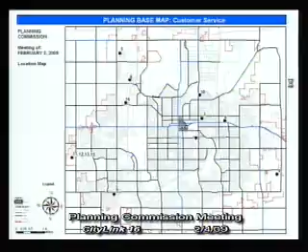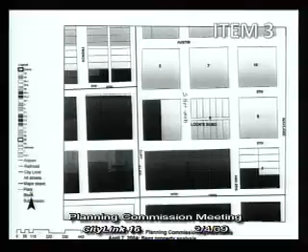The first item on the consent agenda: number 1, approval of January 7th, 2009 minutes of the regular meeting. Number 2, plats. Number 3, 2009-01-03, a rezone from the RD Residential District to the RA-2 Residential District for allowed uses at 1227 East 8th Street and 131 North Sherman Avenue.

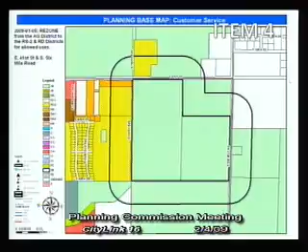Number 4 is 2009-01-05, a rezone from the Agricultural District to the RS2 Residential District and RD Residential District for allowed uses at the southwest corner of East 41st Street and South 6 Mile Road.

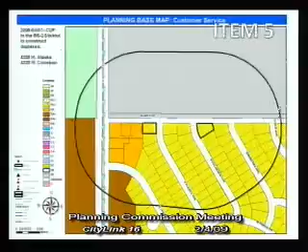Number 5, 2009-01-01, conditional use permit in the RS2 Residential District to allow the construction of duplexes at 4329 North Alaska Avenue and 4320 North Colorado Avenue.

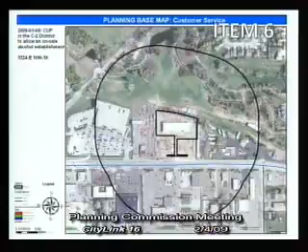Number 6, 2009-01-06, conditional use permit in the C2 General Commercial District to allow an on-sale alcohol establishment at 3224 East 10th Street.

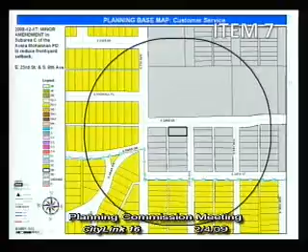Number 7, 2008-12-17, a minor amendment in Subarea C of the Avera-McKennan Planned Development District to reduce the required front yard setback from 25 feet to 10 feet, and the rear yard setback to 1 foot, at South 8th Avenue and East 23rd Street.

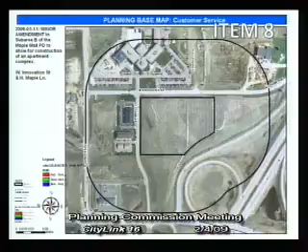Number 8, 2009-01-11, a minor amendment in Subarea B of the Maple Mall Addition Planned Development District to allow for the construction of an apartment complex at the southeast corner of North Maple Lane and West Innovation Street.

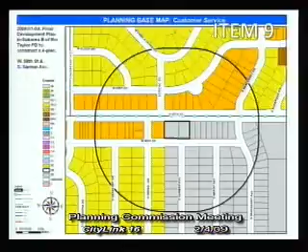Number 9, 2009-01-04, final development plan in Subarea B of the Taylor Planned Development District to construct a 4-unit townhome at the intersection of West 58th Street and South Sarmar Avenue.

And that completes the consent agenda. Are there any objections from the audience to any item listed on the consent agenda?

Madam Chair, my name is Dave Loveland, and I will be representing staff on this and other items. We have received phone calls on item number 5, which is 2009-01-01, the conditional use permit to allow the construction of townhomes in the RS2 district. We would like to ask that it be moved to the regular agenda so we can have public testimony on that item. Okay, thank you. We will move that, and that will be the first item on the regular agenda.

Madam Chair, one quick question. I'm in receipt of a letter that was, I believe, sent to the Planning Commission yesterday.

I believe it's from one of the neighbors, and I notice my fellow commissioners don't have a copy of that letter. It was addressed to the Sioux Falls Planning Commission from, I believe, a neighbor up on North Alaska, dated February 3rd. Are you saying the Planning Commission did not receive this letter? No, I don't think our office received it, at least not to my knowledge. Okay, thank you, Dave.

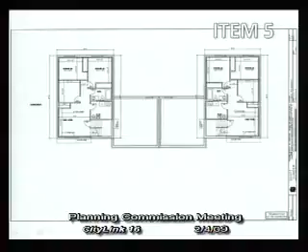Because the application has provided clarity to indicate the location, nature, and extent of the work proposed, and requires a complete plan check by Zoning and Building Services prior to obtaining a building permit, we are recommending approval of the conditional use permit. That concludes staff report. I can answer any questions.

Any questions from the Planning Commission? Madam Chair, in this letter that I read, a neighbor is expressing some concern regarding traffic on that particular street. I drove out there today. It's a street that's just partially completed.

That's correct, I believe. Is that going to be designated — it won't be an arterial, but it'll certainly be a collector street. Would that be a major or minor collector street? If it's a collector, it'll most likely be a minor collector, although we haven't gotten word from engineering yet on how the pace of development goes. The reason it wouldn't be a major collector is because it ends just about a half mile to the west. You're correct in that it is a collector. It is a half mile, so how it's determined by the engineering office would likely be a minor collector.

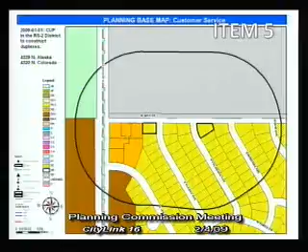I noticed on the housing development, all the lots were engineered for no driveways to come out on that particular street. I think just recently, probably in the last year or so, there were some townhouses built along the west edge of this development that do exit out onto the street. Obviously staff doesn't feel there's a problem with driveways exiting onto the street. We don't think so — there are other examples around the city of driveways on collector roads, especially minor collectors.

I think some of the concern with this location is that the north half of the street has not yet been finished, but it does need to be finished, and will be the responsibility of the landowner on that side of the street to finish it. David, thank you — I just wanted to answer that question for somebody in regards to traffic and parking on that particular street. Madam Chair?

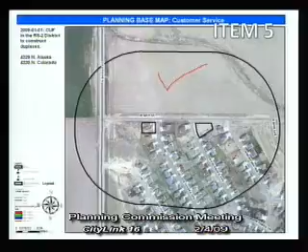Yes. David, the parcel to the north is, I believe, the site for the university, the new university center? That's correct, I think so. Over time, that'll develop into academic buildings? Yep, the state has possession of that entire parcel. Okay, thank you.

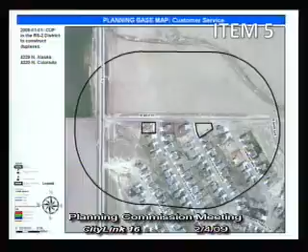Is the petitioner here? Come forward.

Please state your name and address. I'm Sue Olson from Habitat for Humanity. Our address is 721 East Amadon Street in Sioux Falls. Okay, any questions for Sue?

Sue, I might just have a couple. Does Habitat for Humanity own other lots in this particular development? Yes. I've certainly heard about Habitat for Humanity, there's a lot of volunteer work that goes into both new construction and rehab. Is the game plan to build houses in this development for resale?

But I think your goal is to try to achieve affordable housing? Yes, through volunteerism and no interest loans. That's what I thought.

When you looked at these particular lots, they're fairly good size. I think there's going to be some concern about these being twin homes versus houses. Was the size of these lots looked at, was the idea of maybe splitting these lots and creating two lots out of one and building houses versus a twin home, was that entertained at all? The guiding principles in deciding that this was the best use of our land were really the cost of the land and the taxes, the location of the land, both parcels facing 54th Street on the north end of the development, and the adjacentness to other multifamily dwellings. The one lot did not seem feasible, but we felt the best use of our land and resources was indeed to place the twin homes.

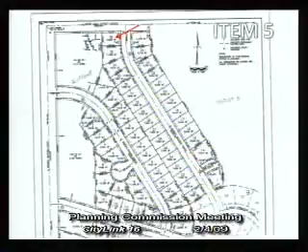If these were houses, the neighborhood wouldn't have a problem. I would probably be, if I had time, over there helping them build it. My church, as a matter of fact, has built some of the houses in that development last year.

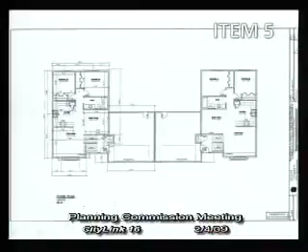That would be the requirement? Yes. On the lot to the west, I noticed the backyard, and this was probably just simply by design, I believe that backyard setback was 25 feet. Well, the issue they run into is that on corner lots, the rear yard setback requirement is 15 feet, and so when they're talking about splitting off these lots, they need to make sure they've got 25 feet for the lot that will then not be a corner lot.

So what you see is that they've done 25 feet for this plan here that Steve is showing, on the rear yard setback, and then on the other one, if you could. I think this one is the 15-foot rear yard, isn't it? See, it's 15 foot there, but there's another 10 feet up to the actual structure. Okay.

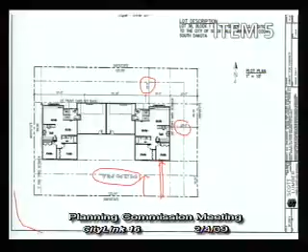So they could have it back to 15 feet, though. They can have it to 15 feet on corner lots, but that's what we needed them to reflect, a 25-foot yard setback, at least for their unit that would not be on the corner lot then. Okay, thank you, David.

Any other questions? So in a sense, you're saying there would be room to do two, separate? It would be, I haven't done that calculation, and I don't think they've gone through the calculation to figure out whether those lots would fit two single-family homes or not. My guess is that probably they wouldn't.

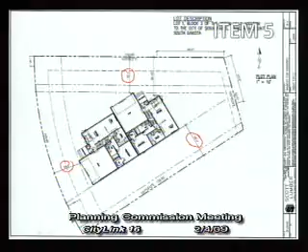So, David, one other question since they've sat down. Do you know, was there any neighborhood meeting, or was it suggested to Habitat to maybe meet with some of the adjacent neighbors to show what they were going to do? Not initially, no. But we did tell them that they may face some opposition because of the duplex nature. But we didn't tell them to conduct a neighborhood meeting.

So would looking at these plans tonight be the first time some of the neighbors have had a chance to see this? We've had some neighbors in our office come look at them, because the posting of the signs alerted a lot of the neighbors, I think, that there was a plan for the duplexes on those lots. So, thank you, David. Thanks.

Any other discussion? Okay, call for a motion.

Madam Chair, I don't personally believe that twin homes are multifamily. And considering where this is at, and the fact that it's ultimately going to be a buffer between the residential neighborhood and the university, and having some knowledge of what was planned on 54th Street, I do believe that's going to go through to the east.

I would make the motion to approve this conditional use permit. I'll second it. Motion's been made and seconded. Any discussion?

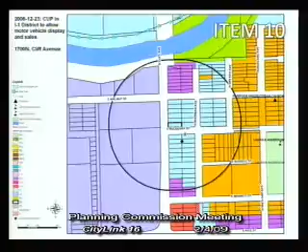Erica is going to check in the other room. This is an item that is a resubmittal of a conditional use permit that you had heard before and acted on for motor vehicle display and sales. Erica is indicating the petitioner is not here. I'll leave it to your pleasure as to how to proceed.

I would suggest we defer it. All those in favor? Aye. Motion to defer. Probably need a motion to defer. I'm sorry, I'll make a motion to defer. I'll second it. Okay, motion's been made and seconded to defer. All those in favor? Aye.

Okay, we move on to number 11. Preliminary subdivision plan in sub-area D of the Westwood Valley Planned Development District for residential lots at the Ellis Road and West 32nd Street.

Madam Chair, if I may, I would like to make a presentation that includes items 11, 12, and 13. Item 12 would be a minor amendment in the same location to reduce non-party wall setback requirements from 10 feet to 7 feet for the proposed project. And item 13 would be a final development plan for the same project at the same location.

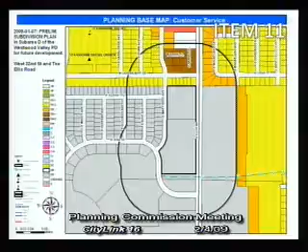Item 11 is a preliminary subdivision plan in sub-area D of the Westwood Valley Planned Development for residential and office lots. It's a total of a 13-acre site that includes both the residential and office lots. The applicant is proposing to run an interior road that would serve residential and office, and then there is a perimeter row of residential lots that would be served off an existing street.

The only other existing site improvements include a telecommunication tower at the north end of a long block of residential units. The requirements of that tower are that it be at least a fall-down distance away from the setback of any residential use. The applicant has indicated that on the preliminary subdivision and has provided the required information for subdivision plans in a lot, block, and street layout.

To the north of the subject property, there are single-family residential in the RS2 residential district. To the south, it's a drainage and conservation area in sub-area G of the PD. To the east, it's future multifamily and office uses in the Roosevelt Park PD on the other side of the arterial street. And to the west, it's future single-family residential development in sub-area A of the PD and some conservation land in sub-area G of the PD.

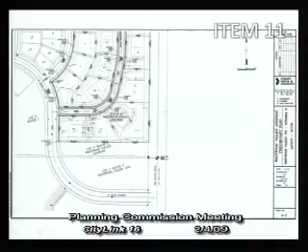This preliminary subdivision plan is a requirement in order to consider the final development plan in item number 13 and also the minor amendment in item 12. The subdivision plan for the entire planned development district was approved in 2003 and again in 2004, so the limits of this subdivision plan are set.

It's simply the interior subdivision of the lots that we're looking at. The street that they're proposing is a public street, and they are right now working with the city engineers to determine the final status of that street, whether it's public or private.

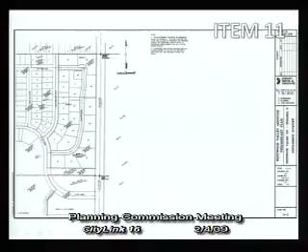Lots that are fronting onto this street may be addressed and come back to you for final development plan approval of non-residential lots or for multifamily lots.

The applicant has indicated on the subdivision plan that the lots being subdivided along the interior street would be held in condominium ownership. They'd be single lot development of fourplexes with condominium ownership of the individual units. That is all acceptable within the PD and is permitted.

The applicant should verify that the height of the tower does not exceed the required distance away from residential uses. Because this plan offers coordination of the urban infrastructure and fosters efficient and orderly community urban growth, staff is recommending approval of the preliminary subdivision plan.

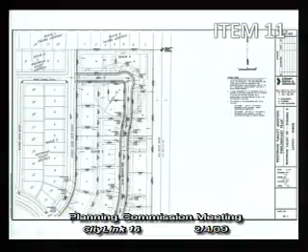Now, looking to item 12 as a minor amendment in order to construct the units on those lots, the applicant is requesting a minor amendment for 2.62 acres of the lots identified. North of those lots, it is still vacant in the sub-area D of the PD, as well as to the south and to the east. To the west, future single-family residential development in sub-area A of the PD and conservation land in sub-area G of the PD are indicated.

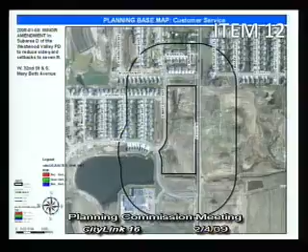When this sub-area was approved as part of the zoning plan for planned development, we referenced RA1 as the underlying zoning district for development of multifamily units. In the RA1, a 10-foot side yard setback is required.

However, the applicant is proposing to develop the subject property for fourplex lots to be again divided or subdivided into individual single-family attached units, up to 4 units attached. The only difference between the RA1 and the RD for this type of unit to be developed is the side yard setback. In the RD district, if we had referenced that, it would only be a 7-foot side yard setback. However, they are being held to the 10-foot side yard setback because that's what it says in the ordinance.

Therefore, the request for a minor amendment to reduce that requirement. Staff is in support of that because the physical characteristics of the property are not changing, whether it's RD or RA1 underlying zoning districts, and are recommending approval.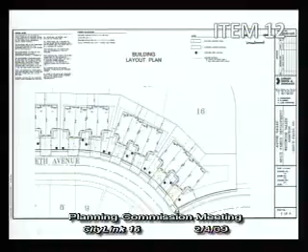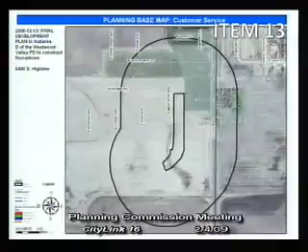In item 13, we get to the final development plan for the units themselves. Here we have a checklist of 16 items to be considered as a complete submittal, complete application. There was only one item that was not complete, and that was the last item on the 16-point checklist, and that was to reference the underlying zoning district requirements, which we just now amended for the side yard setback.

We can take a look at this 2.62 acre site and its impact within the development and on adjacent developments and see that it's pretty well self-contained. The units across the street to the west would be impacted to the extent that parking requirements would actually be reduced when the lots are subdivided into 4 attached units. If it were a fourplex building on one lot, they would be required to provide 6 parking spots on site and no parking allowed in the front yard.

By subdividing each lot into 4 attached units, only 1 parking spot is required for each unit, therefore only 4 parking spots per what was previously 1 lot are required. That is the only difference, really, between the development of the lots as shown. The units, style, design, everything else stays pretty much the same.

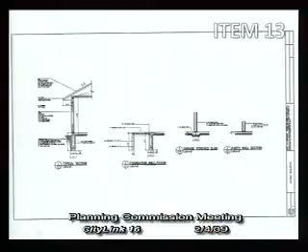The landscaping plan indicates trees to be planted in front of the units, but not in the front yard. However, once the lots are subdivided, that landscaping requirement goes away. It will be up to Zoning and Building Services to reference that in the building permit that landscaping requirements have to be met until the lots are subdivided.

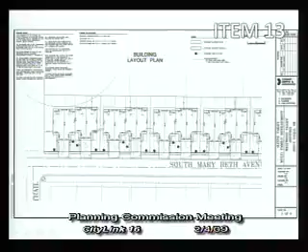Building design indicates single-story residential frame buildings with floor slab on grade. Exterior wall materials are not noted but appear to be residential style lap siding and wood shingles. Roof pitch and materials are 4/12 roof pitch, and roofing material is not noted but appears to be asphalt shingles. It does conform to the height regulations. Floor plans are provided for typical 2-bedroom units attached, and a seating plan is not applicable.

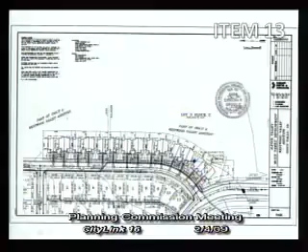There are no other design review regulations, and because the subject application is complete for this public hearing and parking is proposed for attached units on separate lots to be replatted and otherwise requires a complete plan check by Zoning and Building Services for compliance with zoning and Building Code, staff is recommending approval of the final development plan. We've received no calls from the neighborhood or any other property owners in the area, and that concludes staff report.

Thank you, Steve. Anyone from the audience wishing to address this?

Madam Chair, members of the Commission, my name is Damian Grebel. I'm with Earhart Griffin and Associates, 300 North Dakota Avenue, Suite 114, Sioux Falls, South Dakota.

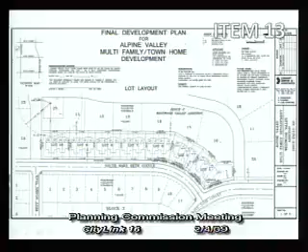I would like to address items 11, 12, and 13 as I am the engineer on all 3 items. We did have a neighborhood meeting for these 3 items. I spoke with the neighbors to the north who said they were in favor of all 3 projects. I also spoke with the people that represented the Family Wellness Center out there, and they also stated that they were in favor of the projects. They'd like to see more rooftops, more houses out there, obviously, for their own business. We do not have any objections to staff recommendations, and we would appreciate your recommendation for approval. And if you have any questions, I'd like to answer them.

Any questions for Damian? Madam Chair, Damian, in my short tenure here in Sioux Falls, I wanted to add that this is one of the finest looking subdivisions to come before the Commission, and I certainly would be one commissioner supporting this. Thank you.

That's quite a compliment coming from him. Any other questions? That's a tough act to follow, Amanda.

Yeah. So I think we should make a motion to approve item number 11. Second. Motion's been made and seconded for item number 11. All those in favor? Aye. Opposed? Oh, come on now, somebody's got to give him some kind of a heart attack, don't they? Still 3 items left. Yeah.

Okay, item number 12. Motion to approve. Second. Motion's been made and seconded. All those in favor? Aye. Opposed? Motion passed. Number 13.

Motion to approve final development plan, item 13. Second, with some reservations. All those in favor? Aye. Opposed? Okay, number 13 passes.

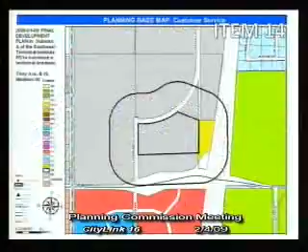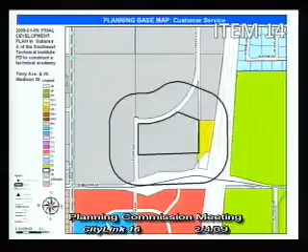Number 14, final development plan in sub-area A of the Southeast Technical Institute Planned Development District to construct a career and technical education academy at the northeast corner of Terry Avenue and West Madison. The applicant's coming before you tonight to construct a new facility for the Sioux Falls School District, which would represent a new type of programming at the high school level. It's a career and technical academy at the northeast corner of Terry Avenue and West Madison Street, effectively just west of I-29.

As a side note, I forgot to mention earlier that the aerials are new, updated from April of this year. So as you can see on your screen, just west of I-29 and just north of Madison Street is the proposed location for the structure. The applicants are Steve Jastrom of Architecture Incorporated, and the owner is Jeff Kreider of the Sioux Falls School District. The size of the parcel is about 20 acres, and it is currently vacant. The history of this site is that the Southeast Technical Institute Planned Development District was initially zoned in October of 1999 and has seen fairly continuous development of apartments and the Southeast Tech campus since that time.

The Career and Technical Academy is designed to enhance educational opportunities in the Sioux Falls area by creating technical and career tracks for students' educational programs. It is expected that several area school districts besides just Sioux Falls will be participating in the programs by sending students up to Sioux Falls for those types of tracks.

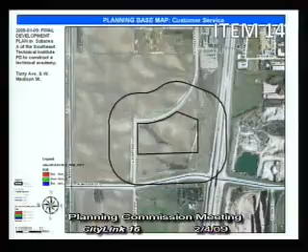As you can see on some of the submitted material, the landscaping plan tree count totals 120 trees, so they're well in excess of the requirements, and that includes parking lot trees. They've got a theme where they have yellow trees on the south side of a dividing line for fall color and red to purple trees on the north side of the dividing line.

Signs they would be allowed to have haven't been shown on their submitted material, but they'd be allowed 100 square feet and 9 feet tall for a freestanding sign, and the wall signs would be allowed 1 square foot for every 5 feet of road frontage on one front, and 1 square foot for every 10 feet of road frontage on the second frontage.

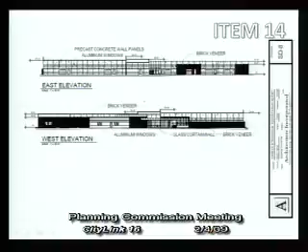The exterior wall materials have been indicated as precast concrete wall panels with a brick veneer, and a glass curtain wall will be installed at the front entrance of the building. Maximum height of 55 feet is allowed in the district. The current plans show that the structure will be around 30 feet.

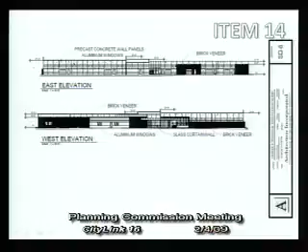Water is available to the site. The applicant should be aware that a cost recovery program is in effect for the sewer in that area, and the applicant should be prepared to meet with the city engineer's office to determine detention requirements for BMP if there are any.

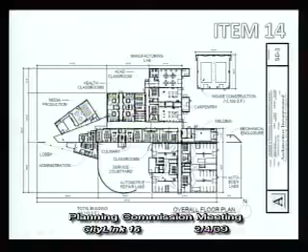Because the subject application has a minimal impact on surrounding properties and provides a well-designed structure and site plan, we are recommending approval of the final development plan with one stipulation: that black ash, green ash, or other ash tree varieties shall comprise no more than 10% of the total deciduous shade tree count, as recommended by the city forester. A landscape plan specifying the exact species and variety of each tree shall be submitted as part of the plan check. We've received no calls on this item, and that concludes staff report. Thank you.

Is the petitioner here?

Good evening. I'm Steve Jastrom with Architecture Incorporated, 415 South Main Avenue here in Sioux Falls. I'm really here just if you have any questions of any kind related to the project.

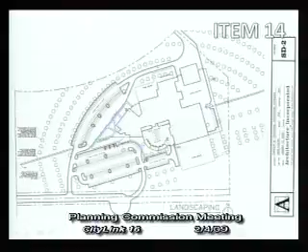Any questions of Steve? Madam Chair, it's not a question, Steve. It just looks like an interesting site plan. Aesthetically, it looks like it's going to be a nice building up on that campus, and I think we're all looking forward to what this will bring to Sioux Falls. So, thank you. Yep, thank you.

Any other questions? Thank you very much. Anyone from the audience wishing to address this? If not, we will call for a motion.

Motion to approve item 14 with one stipulation. Second. Any discussion?

Meredith is sure full of compliments tonight. I know, he's trying to be as easy on me as possible tonight. Some are genuine.

Okay, motion's been made and seconded. All in favor? Aye. Opposed? Motion passed.

Number 15, final development plan in subareas C and D of the Westwood Valley Plan Development District to construct apartment buildings at West 32nd Street and Brook Drive.

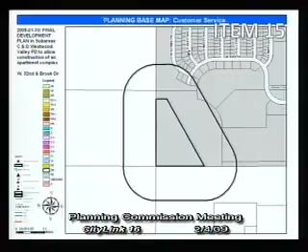The purpose of this application is to approve the construction of 48 residential apartments in 6 buildings on the subject property. Applicants and owners are represented by Joan Franken, Grant Square Limited Partnership, and Ken Dunlap, manager, Westwood Valley Corporation.

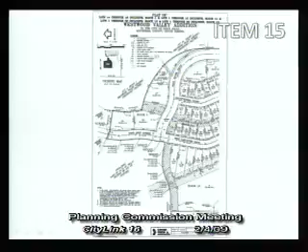It's a 5.8-acre site, currently vacant. To the north, it's future commercial in Subarea E of Westwood Valley PD. To the south, it's future residential in Subarea C, and to the east, future residential or office in Subarea H, and to the west, west side transportation corridor and future commercial in Subarea E of Westwood Valley PD.

This planned development district was put together with the idea of having adjoining uses that are residential, non-residential, and transitional. Therefore, there were other regulations indicated in the PD sub-area regs to apply to any development that came forward as a final development plan, and those are listed in your report.

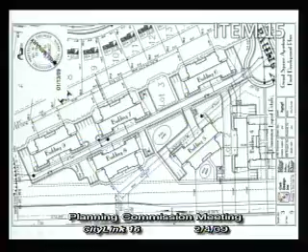For sub-area D, development shall coincide with completion of proper street and utility improvements. An approved signage plan, preliminary subdivision plan, and access plan for the sub-area is required. Approved landscape buffer at the north sub-area boundary is required with the final development plan. Street trees shall be placed at 40-foot interval spacing along the parkway.

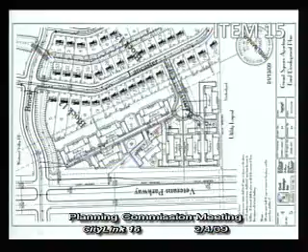Other regulations in sub-area D include development coinciding with proper street and utility improvements, an approved signage plan, and preliminary subdivision plan and access plan, and also a combination of earth berms, shrubs, and trees to be placed and utilized to buffer the residential area from the parkway. Those are the other regulations that would apply to this project.

Consulting engineers and project architects are listed for your reference. The application for buildings located on both sides of a driveway running north from the turnaround on Carmia Circle. The applicant should verify the proposed addressing plan for buildings and emergency vehicle access requirements with the city engineering and city fire marshal. That's just a general note, because of the limited site access, and the applicant is aware that they have to do that.

Getting to the landscaping, basically we start having to deal with those sub-area regulations that I referenced. The plan notes indicate a total of 38 deciduous trees with 1 3/4 inch minimum caliper being planted on the subject property, and staff comments that a minimum of 13 trees to be planted in the Parkway Street Boulevard along sub-area D. A minimum of 15 trees are required in the minimum front yard landscape setback along the Parkway 100-foot right-of-way indicated on the plan, and a minimum of 5 trees are required in the minimum front yard landscape setback along the circle right-of-way.

Parking lot screening notes on the plans indicate that they are meeting those requirements as required. The number, size, and species of plant materials is not provided, but will be required for a building permit, and staff recommends that a variety of tree species be provided according to the formula referenced in the stipulations.

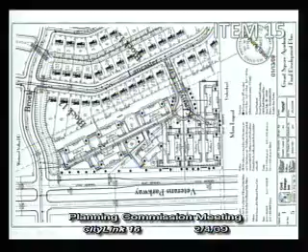A proposed height of 35 feet conforms to the height limitation of 45 feet, and floor plans are provided indicating 2 three-bedroom units and 8 enclosed garages on the main level. The upper floor plan indicates 2 three-bedroom units and 4 two-bedroom units with decks accessible by enclosed stairwells.

We went out to Hartford and took a look at the same plan that's been constructed out there, and we're pretty impressed with the quality of the apartment buildings as constructed. They're proposing to do the same. They've provided us with photographs taken at the opening in September, and you can see that the quality is there as far as the design is concerned.

Given the 16 points required for a final development plan submittal, we believe they have complied with all except item 5, which is not provided but would be required for a building permit - that's outdoor lighting type and location. Item 13 is not provided and is required for a building permit - documentation of ownership and maintenance responsibility of any common open spaces, structures, or facilities, including private streets or driveways. And item 16, which references the sub-area of underlying zoning district requirements, which would be RA1.

Because the application is an allowed use in the PD and otherwise conforms to the sub-area regulations as noted, staff is recommending approval with the following stipulation, in parts: Part 1A is that street trees be placed at 40-foot interval spacing on a revised site plan along the parkway, that a combination of earth berms, shrubs, and trees to buffer the residential area from the parkway be indicated on that plan, and that a variety of black ash, green ash, or other ash tree varieties comprise no more than 10% of the total shade tree count as recommended by the city forester in the published street tree guide. That concludes staff report.